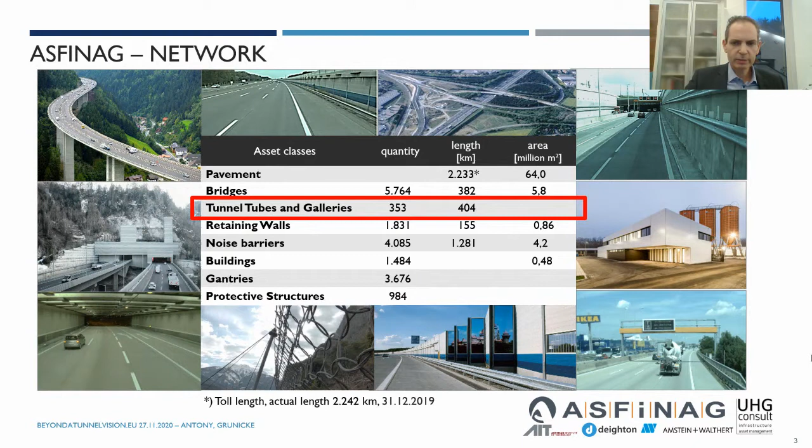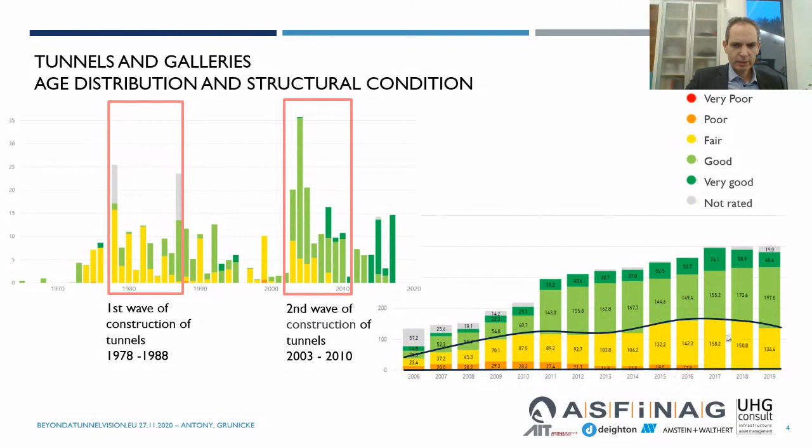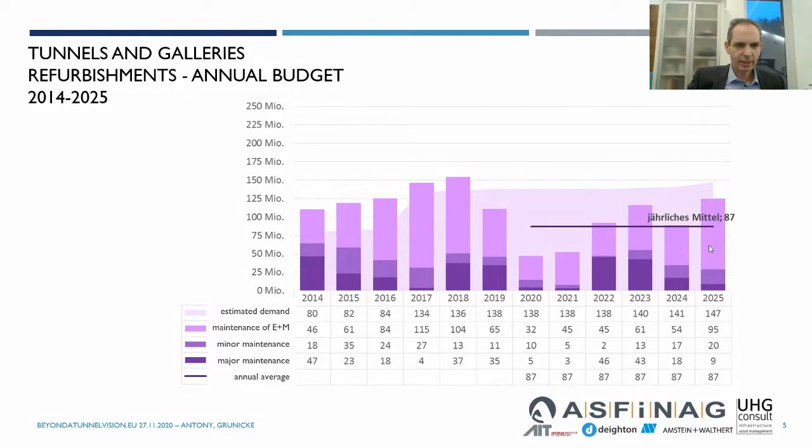In order to develop new approaches here, a research project for the optimization of maintenance works in tunnels was launched. And at this point, I will hand over to Urs, who will present us the results of the project. Thank you till now, and I will switch now to Urs.

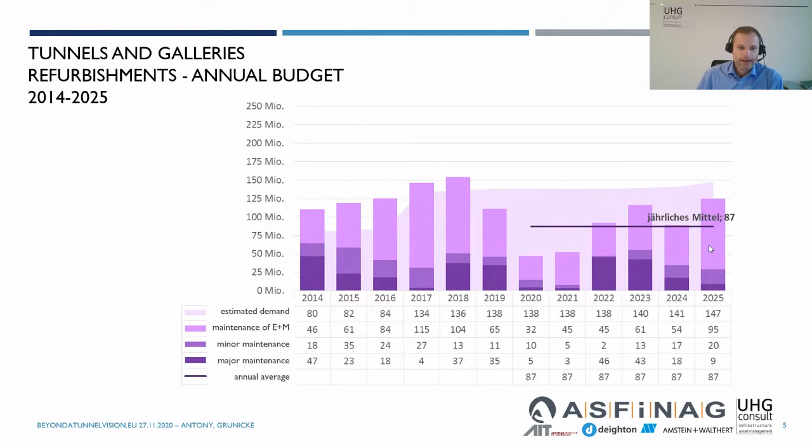Referring to the speakers in earlier presentations in these sessions, asset management is more than project management, and as Laura said, you can triangulate it with different objectives. And I would even go a step further. I would say there are more objectives to asset management. Of course, there is always costs. There is the safety issue. There's the issue of level of service. But as Christoph impressively showed, we are spending here several hundred millions of euros in 5 years and so.

So what about accountability? So we need to make our decisions based on evidence. So that's a requirement in asset management, to make fact-based, evidence-based decisions, as also Natasha showed when she presented her BIM strategy. And since our decisions and measures take effect in the future, we need to be able to predict the performance of our assets and how we deal with them.

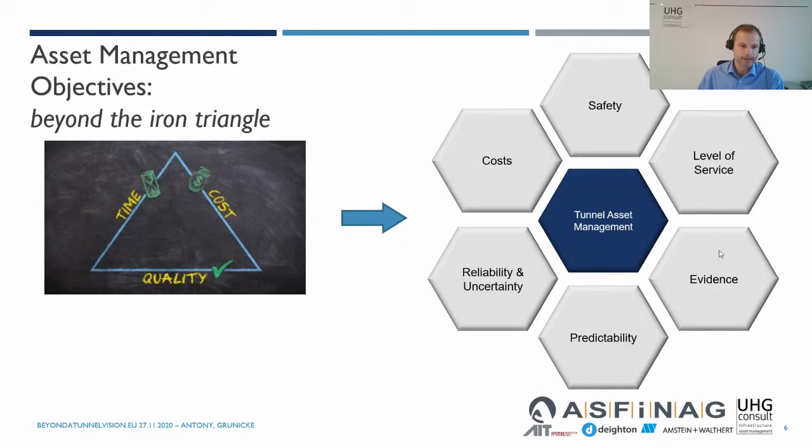And the further we look into the future, the more the issue of uncertainty and reliability arises. Not only reliability in the present stage, but how reliable will our assets be in the forthcoming future. So that's the scope of this research program Christoph mentioned, this program OPTimAL, where we try to encompass all those objectives into one decision support tool called OPTimAL.

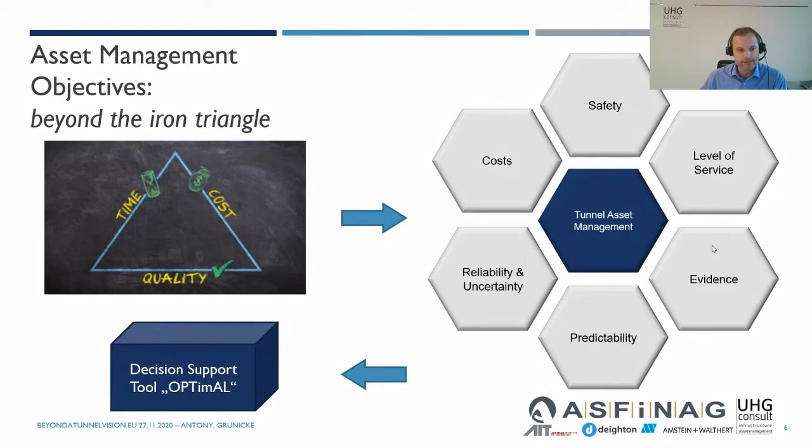Road tunnels and rail tunnels are basically the same issue here. They're more than just a one-dimensional concrete tube, as you definitely know. There are numerous assets or sub-assets in there. In Austria alone, we talk about 52 different components and sub-assets. That means 52 different materials, 52 different service lives.

And now as an asset manager, you have to ask yourself, okay, how do I do my maintenance? How often do I go in there? Because if you close the tunnel every year, once one of those assets expires and has reached its end of service life, you will end up with a very, very bad level of service. So you need to bundle, of course, those measures.

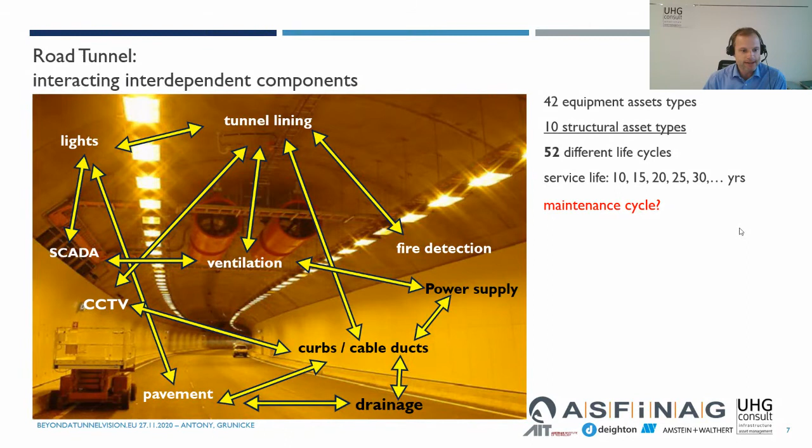And as if this was not already challenging enough, all these different assets are interacting with each other, not only in the function, and it's usually more the rule rather than the exception. When replacing an asset, you usually can do that only when also touching another asset, even renewing it, even though that other asset hasn't even reached its end of service life yet. So you would give up on some service time for that.

This means that there are a lot of collateral measures when you actually want to do maintenance on only part of the assets. And you need to be able to address and assess the amount of those collateral assets. That can become quite complicated, actually, because of this numerous interaction. But you can model that rather easily in a matrix, where you can easily formulate the degree of interdependencies. And with this matrix, it is possible to assess those collateral measures.

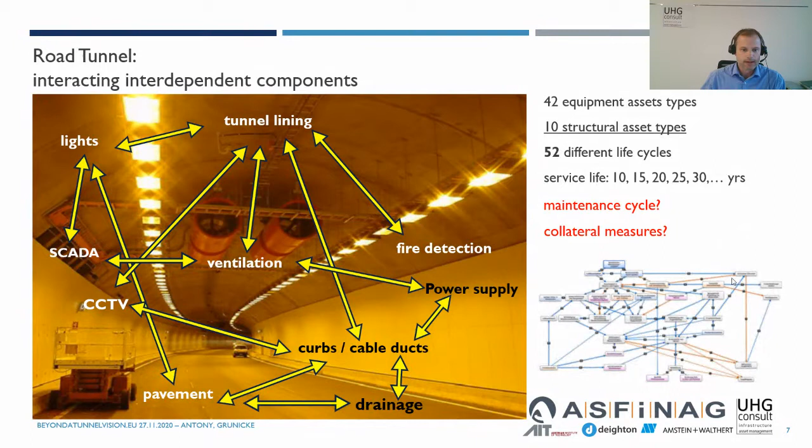And it also gives quite a good idea about the topology of the system and what are the central assets that interact with a lot of other assets. Also, in terms of a RAMS process, in terms of maintainability, that's also quite a benefit. Okay, but this doesn't already answer the question: what is the optimal maintenance cycle?

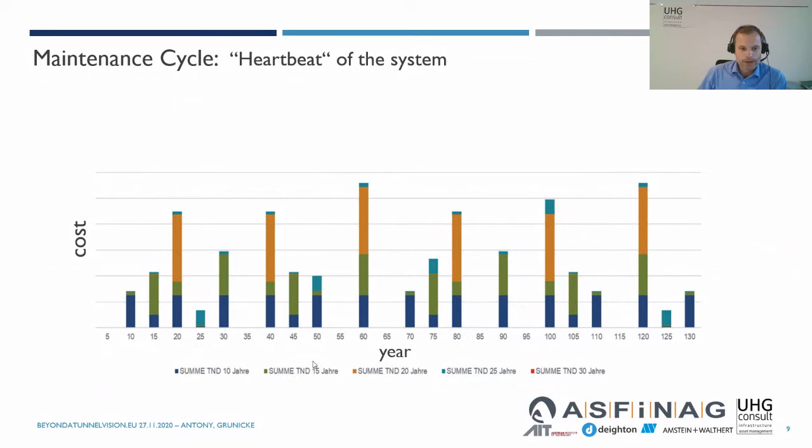If you draft all your asset renewal efforts on the timeline, just as they occur, depending on their service life, without bundling them in the beginning, you would come up with something like this. And you will see in this example, which is typical for an Austrian highway tunnel, that every 20 years or so, there is a concentration of efforts here in the year 20, 40, 60, and so on, just by the natural expiration of service life. So you could call that the heartbeat of the system.

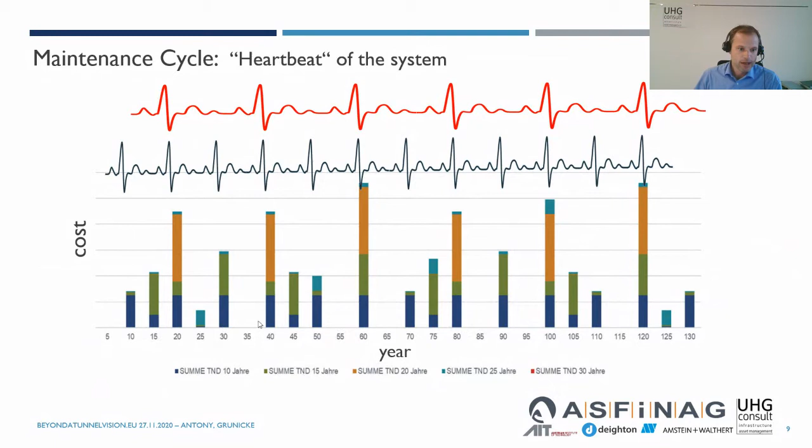And why not take those 20 years as a starting point by saying, yes, let's make a 20 years maintenance cycle. And every asset that expires in between, we delay the measures for another 5 years, or make them earlier. If we make them earlier, of course, that comes at the cost of giving up some service life. And if you delay them, of course, it comes at the cost of a reduced reliability, maybe because the component is older and has more faults and defects. And you need to be able to address that. So it involves a bit of prediction and looking into the future in the long term and short term.

And looking into the future is not rocket science. It's rather straightforward, even though the mathematical background appears to be sometimes a bit complex. And it can be frustrating at times to collect all the data. But usually the data is there. The challenge in this context is that data, for example, for ventilation, is somewhere else and in a different format than the data on the concrete lining. And to integrate all that data, that's just a piece of homework you have to do.

And not every asset has a similar amount of data, but basically it's better to have crude models with few data than no degradation model at all. Because if you don't use a prediction model, basically you're flying blind. And that's not what we want to do in accountable asset management, do we?

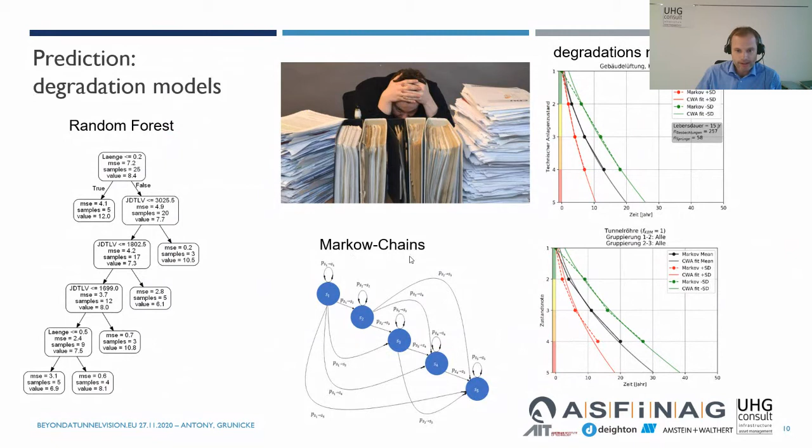Yes, future and reliability. Reliability, or to put it differently, the risk of unscheduled downtimes. How can we assess that? Basically, this is risk management. You can make that relatively easy, actually, as well, in terms of a qualitative risk assessment. Risk, as you know, is a product of probability and consequence of failure. And here we are talking about the probability of unscheduled downtimes due to aging components. And the probability of failure is basically a function of its condition.

And since we already have the prediction models, as I said earlier, we are also able to predict, with a certain degree of uncertainty, of course, the probability of a failure in the future. And of course, it is also influenced by some other aspects like how closely we monitor our assets and how well we know about our assets at all. And digitalization, of course, helps in that context.

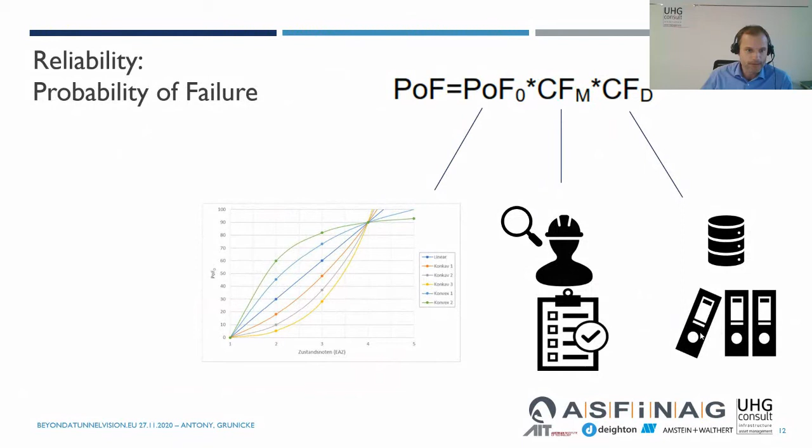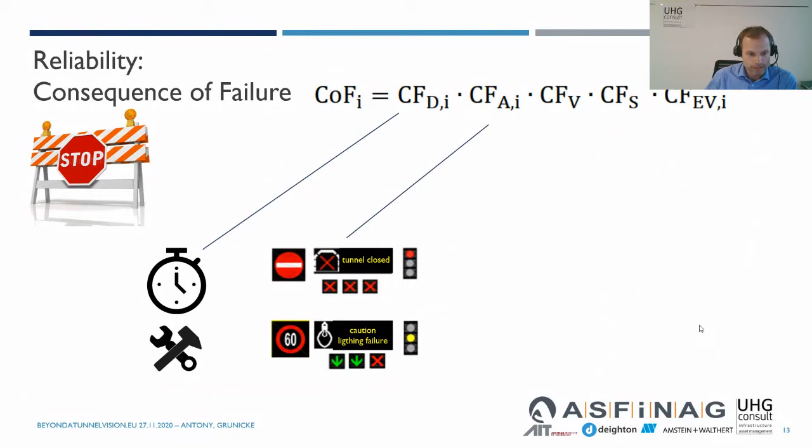The consequence: we found that it's the most straightforward to measure the consequence of unexpected downtimes in terms of the duration of downtime of the disturbances. Are we talking hours, days, or even months? Is the disruption causing a complete closure of the tunnel, or can we still operate it in a reduced mode? How much traffic is involved? Are there diversions possible in the network? The criticality and resilience of the network?

And rather trivial things, but no less important, especially for safety equipment: what about spare parts? Do we have them in stock, and how quickly can we have them on site for repair?

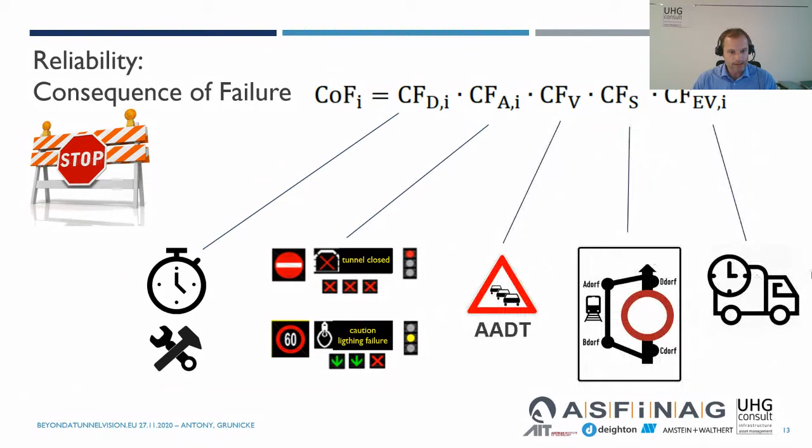Yes, so let me summarize. We have captured the system topology and the dependencies between the assets, so we don't run into the risk of forgetting the necessary collateral measures. We have collected all our data and evidence to find prediction models for the performance of our assets in the future. And we have found a way to define and assess reliability of our assets and the performance of the reliability for each single asset and the collective asset in the tunnel system, and even for the entire tunnel portfolio.

So now, what we made with all these stones, we came up with this framework, which allows us to have a holistic asset management. And with this toolbox, we can now build maintenance strategies and maintenance plans, both on strategic and operational level, and compare them against our strategic objectives. The framework is basically ready for implementation, which I'm sure will happen within the next coming months.

And the beauty of it is that we can already do it today. So we don't need to wait impatiently until we have a full degree of total digitalization. With all the things we have at hand, we can already start making our decisions. And now imagine the potential that unfolds once we have total digitalization, once we have it all more or less just a click away. Christoph and I will be happy to answer your questions.